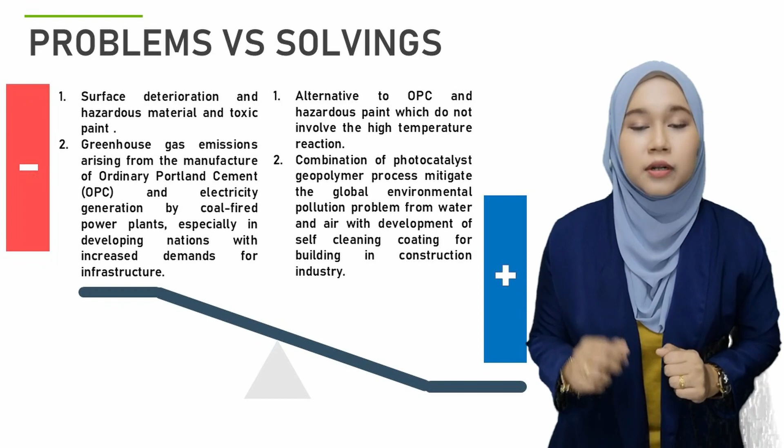What is geopolymer actually? To simplify the meaning and mechanism of geopolymer, it is an ecologically friendly inorganic material which can be produced at low temperature from industrial waste such as kaolin, fly ash, GGBS, or mining residue. That is the way we turn waste into something valuable.

Geopolymer incorporated with photoactive material such as zinc oxide and titanium dioxide, in the presence of UV and UV-visible radiation, can oxidize and decompose surface pollutants on a building or roadway, allowing the products to be subsequently easily removed later by rain, washing with water, because of the hydrophilic surface of the photocatalytic geopolymer with a low water contact angle, allowing it to slide off all the water and dirt properly.

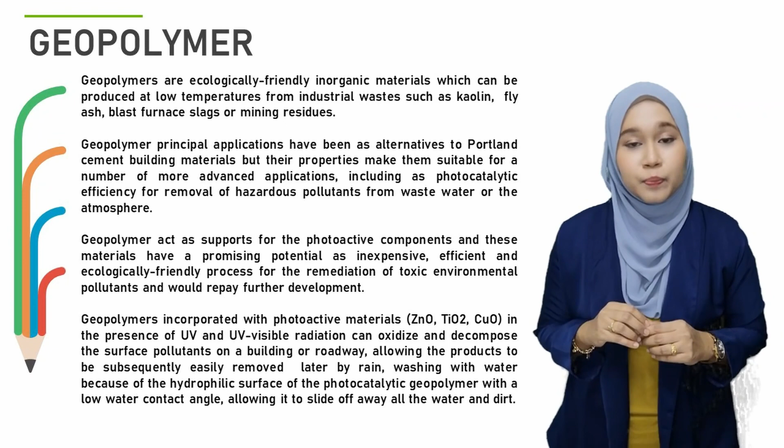A photocatalyst coating is energized by the presence of light. The excitation of the photocatalyst causes a number of reactions at the surface of the coating. This light stimulation of the photocatalyst transforms the coated surface, creating air purification and self-cleaning properties.

So this is how we produce the geophotopaint. First step, we are using metakaolin as inorganic material combined with alkali activator, which is sodium hydroxide and sodium silicate.

After that, zinc oxide as photocatalyst material was added into the geopolymer paste homogeneously. Next, the paste was cured for 24 hours at room temperature. So it's time to coat our geophotopaint on any substrate, including ceramic, concrete, and steel.

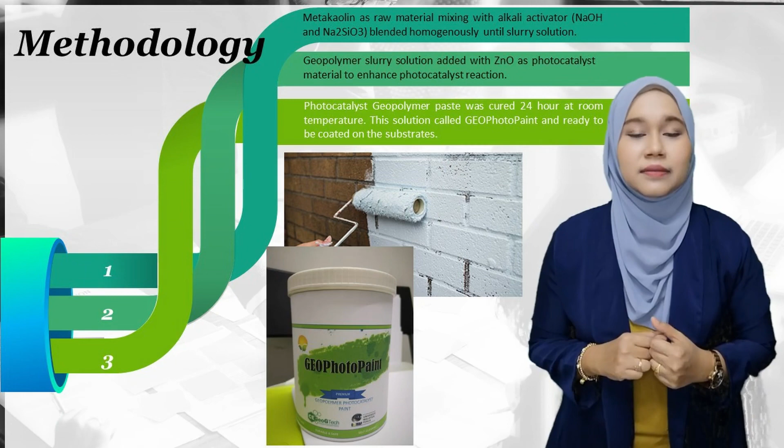Listed here are several geophotopaint performances. First, on the effect of photocatalyst by degradation of methylene blue, shows the color absorbed by UV light after 60 minute exposure. That is graded compared with other organic coatings which do not have the effect of photocatalyst.

Second, geophotopaint has high adhesion strength between coating and substrate, up to 5 megapascal. Another performance is rapid setting time, which is 60 minutes compared with OPC's 90 minutes, and other paints usually around 4 hours.

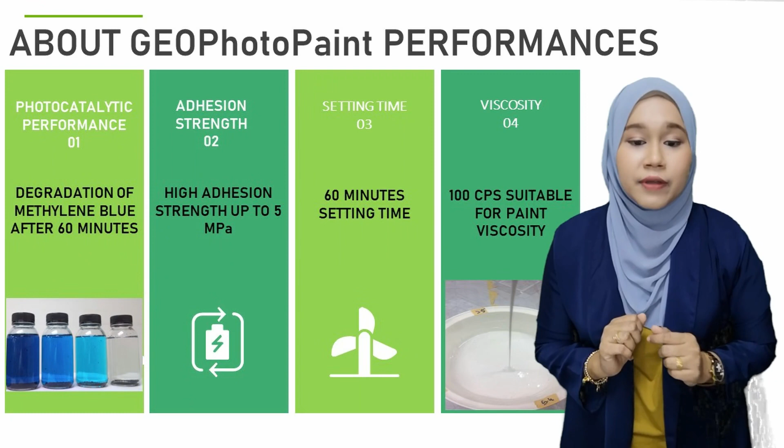I'm very happy to share the benefits of using geophotopaint. First, it is non-toxic and less hazardous. This is a very good benefit to human life and the environment.

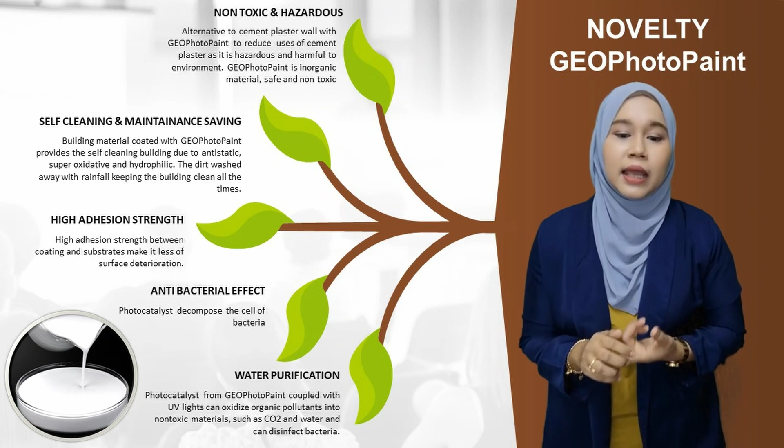Self-cleaning and maintenance saving: high adhesion strength between coating and substrate makes less surface deterioration and long-lasting coating. Antibacterial effect because it decomposes the cell of bacteria, and also water purification by decomposing dirt and pollutants that contact the surface. It can be used in a wide range of applications.

So these are all the suitable applications of geophotopaint, including brick, ceramic, tile, bridge, pavement, and many more.

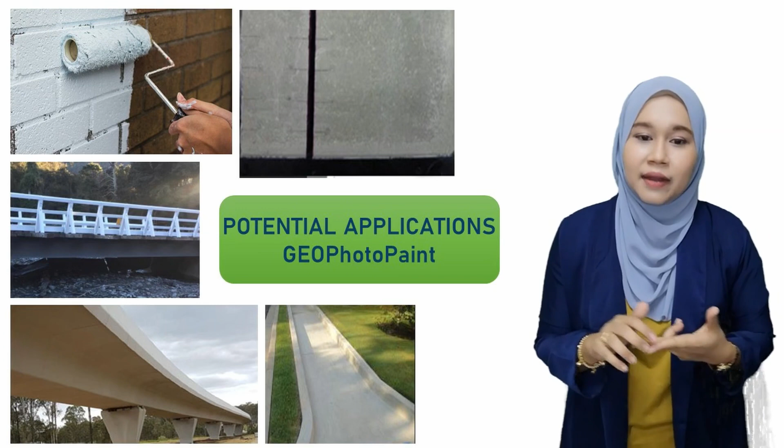What you get from this product is self-cleaning properties, which surely reduces maintenance cost, easy application, fast setting time, ability to reapply this coating, and good adhesion bonding between coating and substrate.

Our research has also been patented with a US patent, Malaysian patent filing, and also European patent filing. So thank you very much for listening, and I hope all of you get the benefit from this invention.

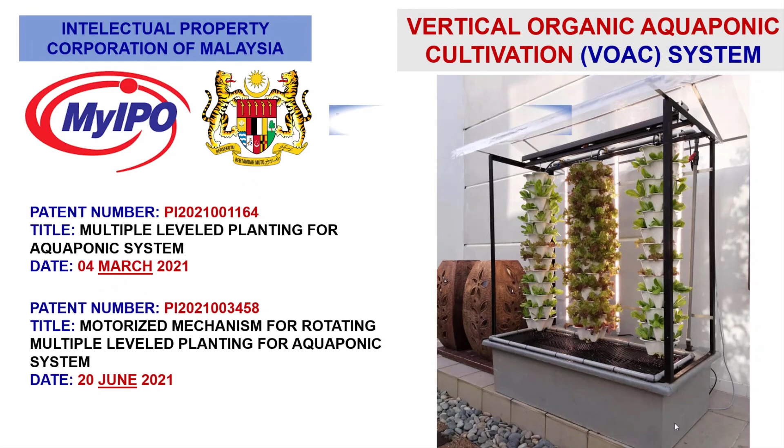Vertical Organic Aquaponic Cultivation (VOAC) System. This innovation has been patented at the Intellectual Property Corporation of Malaysia in June and March 2021.

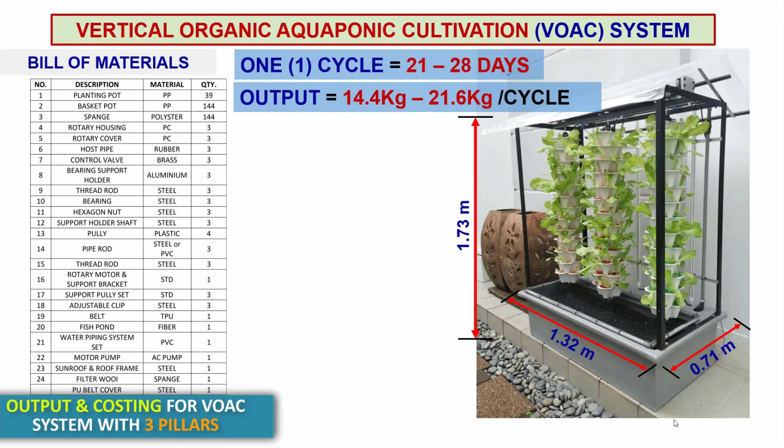One cycle of the VOAC system is between 21 to 28 days, and the output of vegetables per cycle is between 14.4 kg to 21.6 kg. These are the costs of the VOAC system.

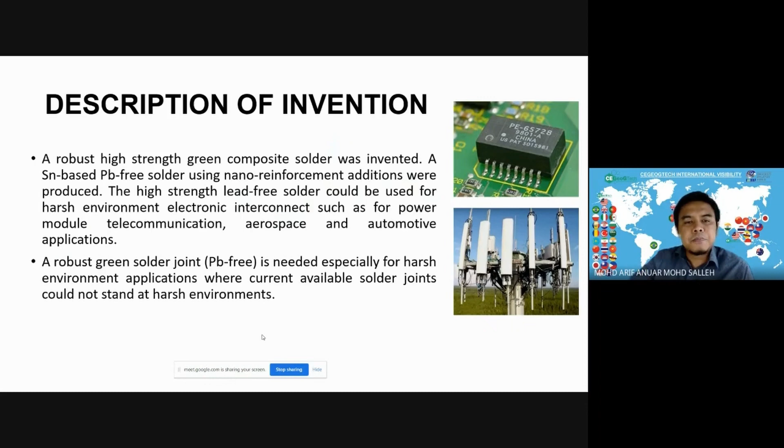This is an example of where the solder joints are inside an electronic or electrical device. This is an example of a motherboard of your iPhone. So this is where the lead-free solder joints are.

So the lead-free solder joints are made with three main objectives. First is for a conductive path. Secondly is for thermal conductivity, and thirdly is for mechanical support.

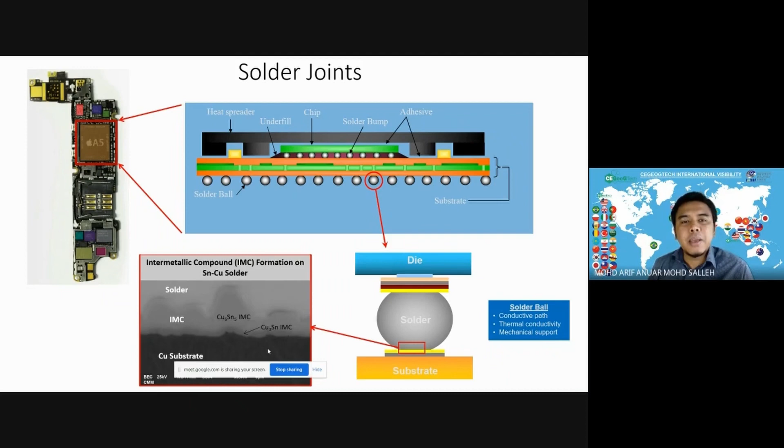For the problem statement: telecommunication networks, aerospace, and automotive components comprise digital electronics. Like any other computer or sensitive electronic components or equipment, these electronic components are susceptible to damage from mechanical loadings, temperature, and also electrical disturbance.

On the other hand, due to rapid technology advancement, old electronic components normally end up in landfill. Thus, an environmentally friendly electronic component following the RoHS legislation, the Restriction of Hazardous Substances legislation, is needed.

Besides that, we also need to have robust solder joints in order to eliminate catastrophic failures, especially in aerospace applications. For example, the air crash investigation for the Airbus A320 from Surabaya to Singapore in December 2014 found that the failure was due to cracked solder joints.

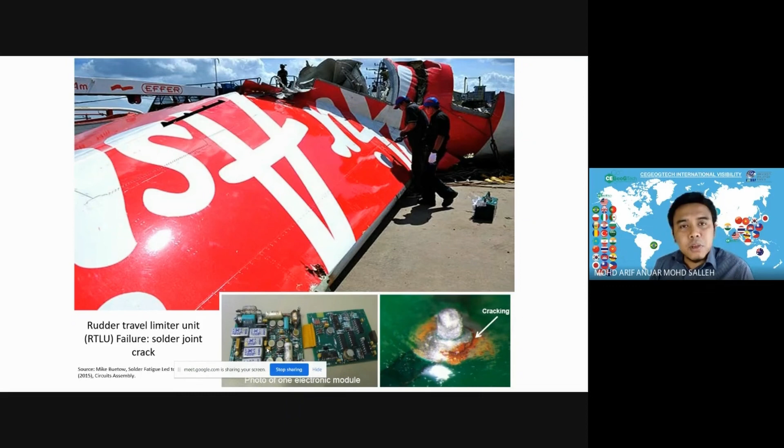From detailed investigation, it was identified that the rudder travel limiter unit (RTLU) failure was due to solder joint crack. This shows why we really need a strong, robust lead-free solder joint, especially for harsh environments such as aerospace application,

automotive application, and also telecommunication applications. Following the Sustainable Development Goals, our invention follows SDG number 9, Industry, Innovation and Infrastructure, and also SDG number 11, Sustainable Cities and Communities. The reason for number 9 is since we are producing robust lead-free solder joints, it is for the electrical interconnects for various applications. On the other hand, SDG number 11 is due to the lead-free solder joints that we are producing.

So we know that due to rapid technology, electronic components normally end up in landfill. Since we are producing these lead-free solder joints, we are able to make sure that we have a sustainable city and also community.

The novelties of our invention are, firstly, its excellent thermal resistance for high power module applications, whereby our solder material can stand up to high temperature. Besides that, the outstanding solderability and mechanical properties of our solder joints.

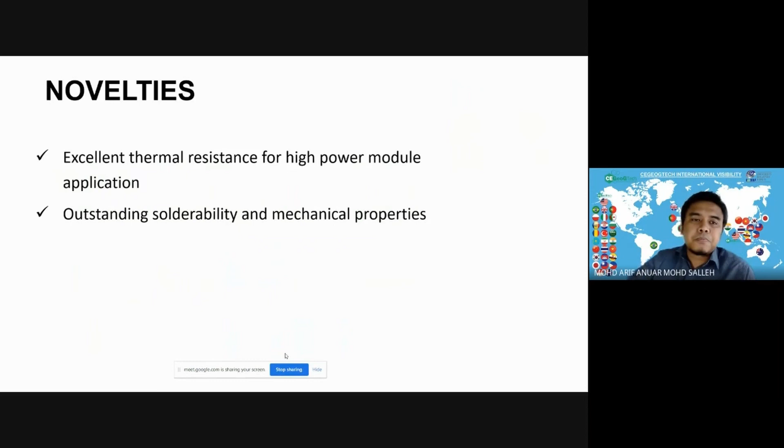The invention advantages of our solder material are: first, excellent solder with good wettability. Second is excellent thermal stability. Thirdly is low production costs. Fourthly is oxidation resistance. And finally, environmentally friendly, since we are producing a lead-free solder material.

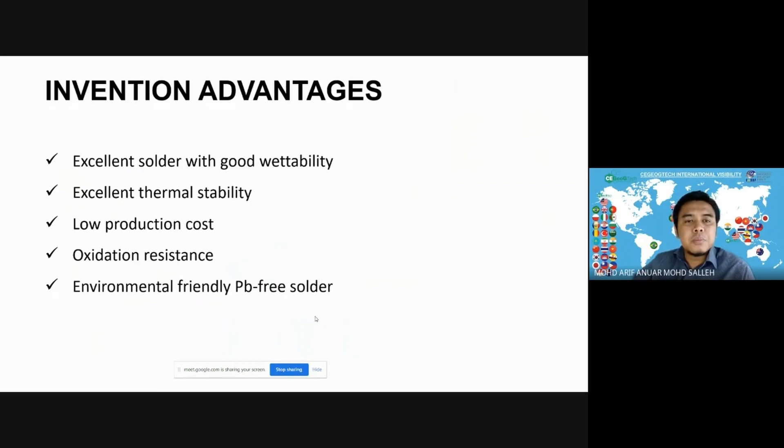For the commercial potential, it is a non-hazardous solder material. It is recommended to replace the existing tin-silver-copper, normally known as SAC, and also tin 0.7 copper solder for different solder applications. It could also be used for a wide range of harsh environmental applications, such as telecommunication, aerospace, and automotive applications.

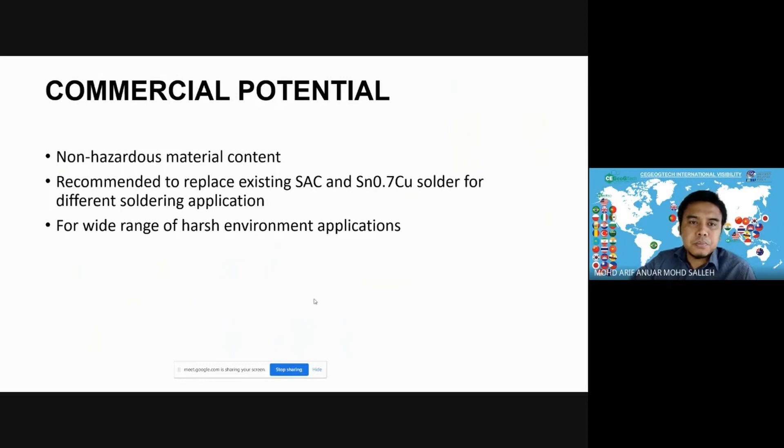This invention is in collaboration with Nihon Superior, based in Osaka, Japan. This research project was conducted since 2012.

For the patent of our invention, we have patented our invention, which is patent granted. First is the solder composition and method of production thereof. And also recently we have filed a patent for a system and method of producing granulated solders.

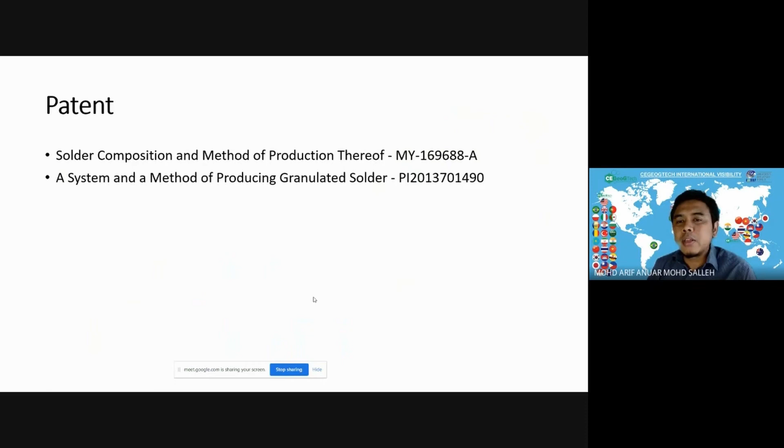Besides that, in research development, we have also published several leading impact publications. For example, in 2017, we published in Scientific Reports. In 2016, we published in Journal of Electronic Materials. In 2018, we published in Solid State Phenomena.

We have also published or presented this invention in several leading conferences, such as the International Conference of Functional Materials and Metallurgy in 2016, and also a conference which led to the publication in Materials Science Forum in 2016.

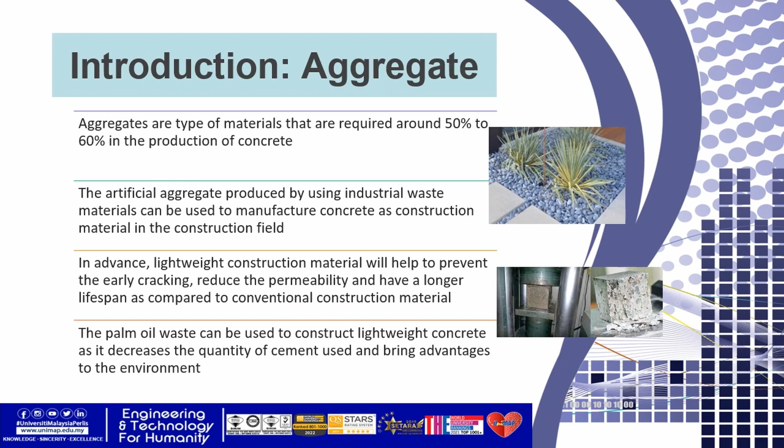What is geopolymer? Geopolymer has been viewed as a potential, ideal, and green material to replace cement. The recycling of Portland cement-based concrete as recycled aggregate was investigated diffusely, while the reuse of geopolymer was paid little attention. In comparison to OPC concrete, geopolymer is characterized by a low carbon footprint with high chemical resistance,

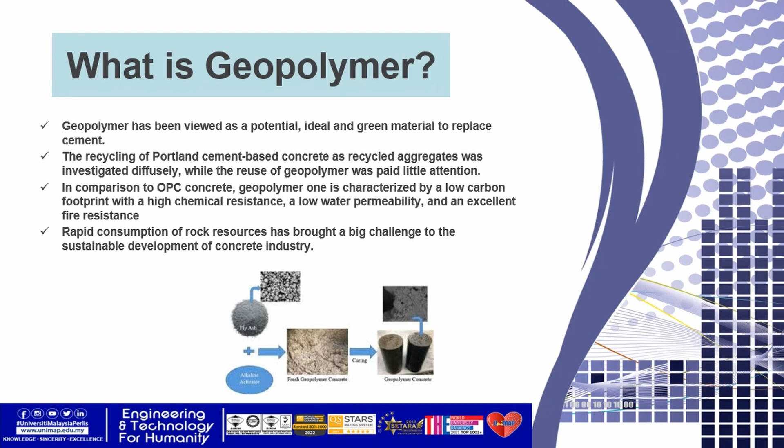low water permeability, and excellent fire resistance. Rapid consumption of rock resources has brought a big challenge to the sustainable development of the concrete industry. The main problem statement is related to the high abundance of palm oil waste in Malaysia.

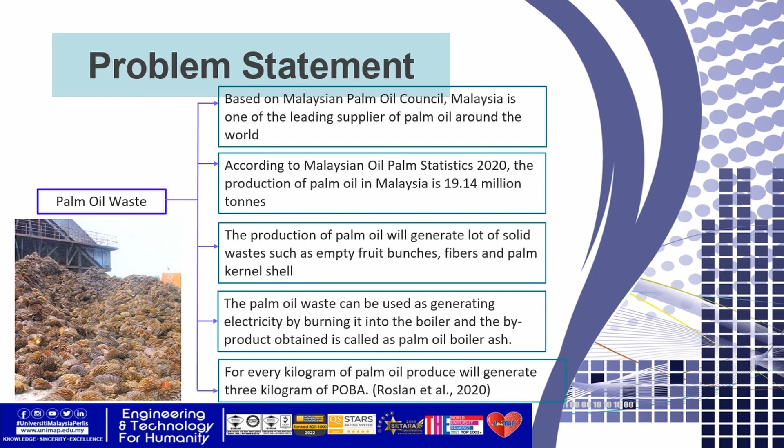Based on the Malaysian Palm Oil Council, Malaysia is one of the leading suppliers of palm oil around the world. According to Malaysian Oil Palm Statistics 2020, the production of palm oil in Malaysia is 19.14 million tons, and the production of palm oil will generate a lot of solid waste such as empty fruit bunches, fibers, and palm kernel shell. The palm oil waste can be used for generating electricity by burning it in the boiler, and the byproduct obtained is called palm oil boiler ash.

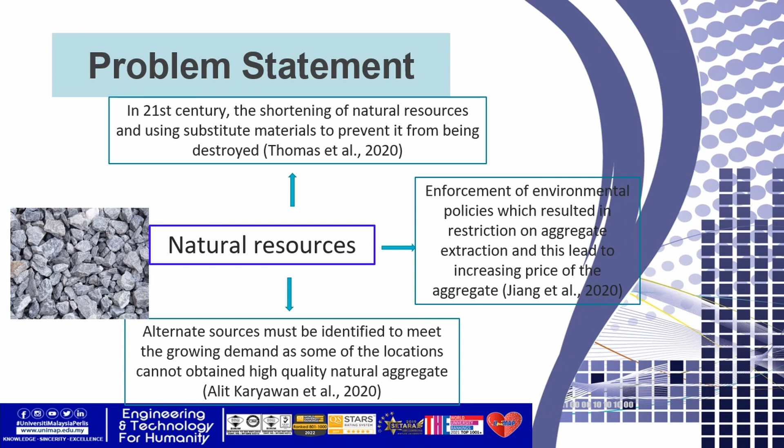The other problem statement is related to the depletion of natural resources of aggregate. New alternative production of aggregate should be investigated to meet the growing demand of aggregate. The method of synthesis of aggregate, especially for lightweight aggregate, consumes high energy due to the high sintering temperature used to achieve the lightweight properties.

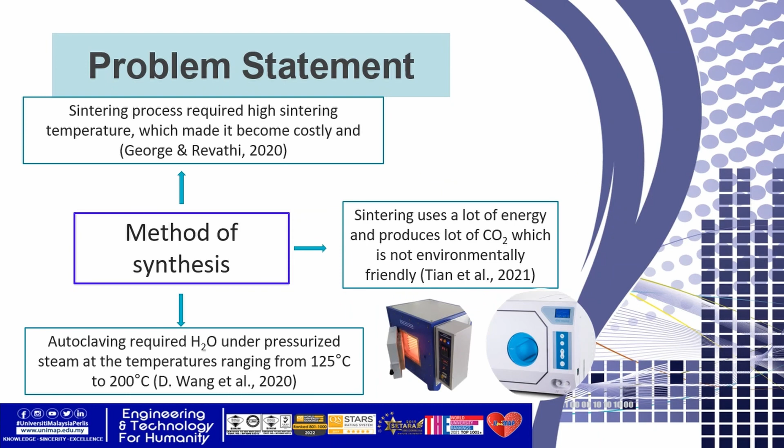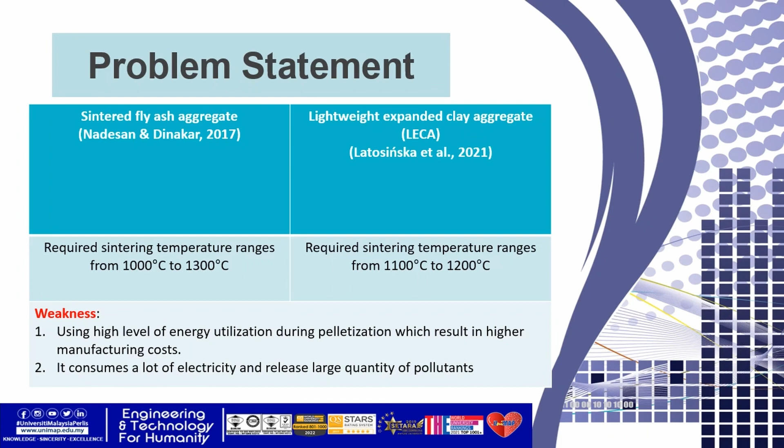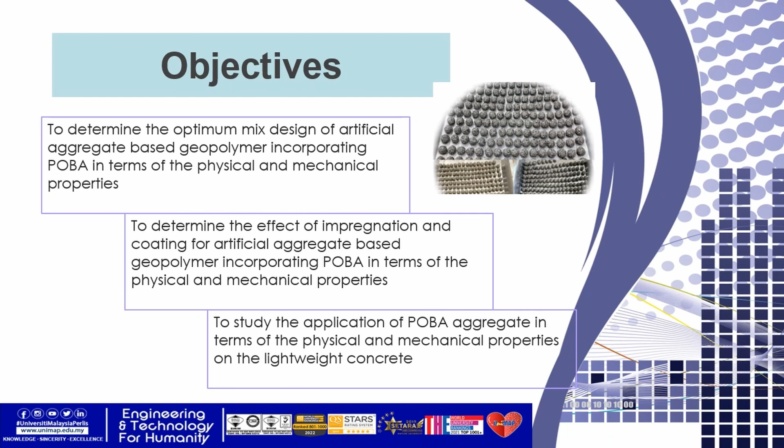This led to high energy used during the pelletization process that results in higher manufacturing costs. Thus, artificial aggregate-based geopolymer incorporating palm oil boiler ash is introduced in this research.

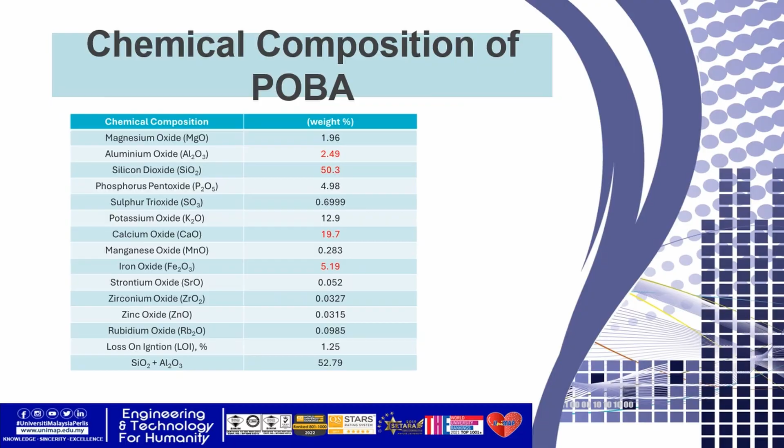This is the chemical composition of palm oil boiler ash. It shows that POBA consists of a high composition of silicon dioxide, aluminum oxides, and calcium oxides, which makes it suitable to be used as raw material for geopolymer, and more environmentally friendly since it does not use high sintering temperature.

The palm oil boiler ash that has been collected will be ground and sieved into powder form. The palm oil boiler ash will be mixed with an alkali activator consisting of sodium hydroxide and sodium silicate to form the POBA geopolymer paste. Then the POBA geopolymer paste will be pelletized into the required shape and size to produce POBA geopolymer aggregates, which will be hardened in the oven at 80 degrees Celsius for 24 hours. The ready samples will then be tested for specific gravity, water absorption, aggregate impact value, and aggregate crushing value.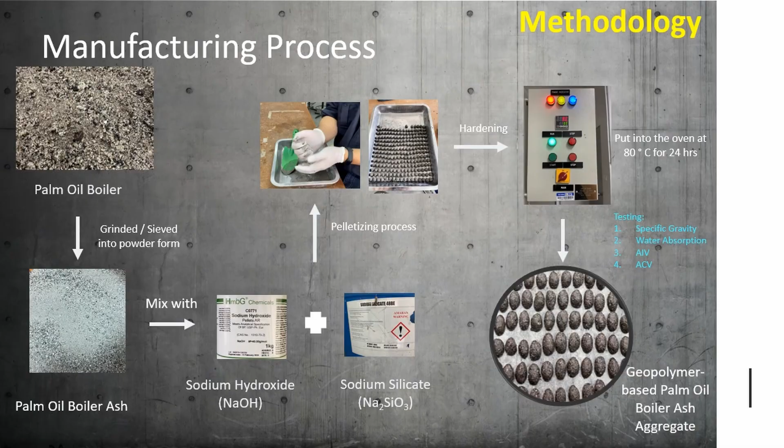Here is the video showing the process of producing POBA geopolymer aggregates. First, palm oil boiler ash is grinded into fine powder form by using a mortar and pestle.

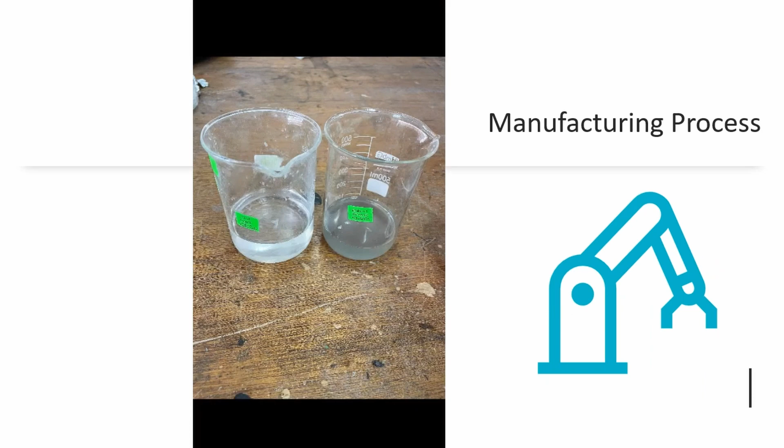Then, palm oil boiler ash is mixed with sodium hydroxide solution and sodium silicate solution until it is mixed well.

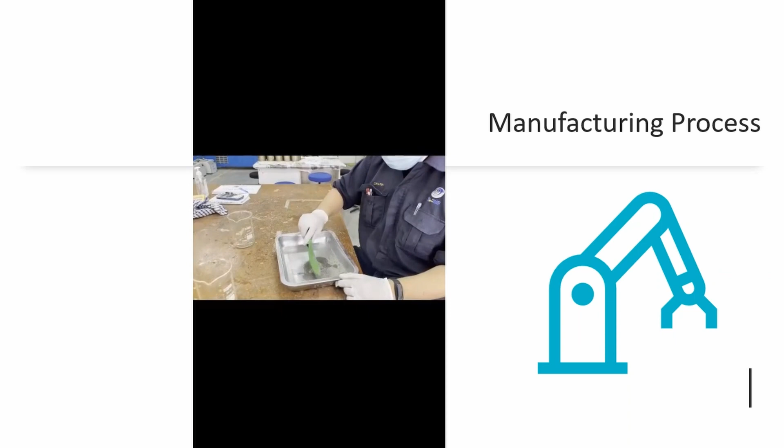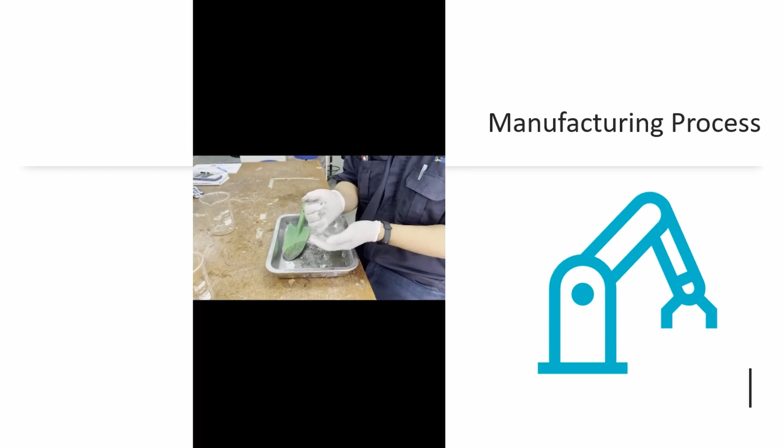The geopolymer-based palm oil boiler ash sample is manually made into aggregate size by hand. After the aggregate is made, the artificial aggregate is poured onto the tray and the step is repeated.

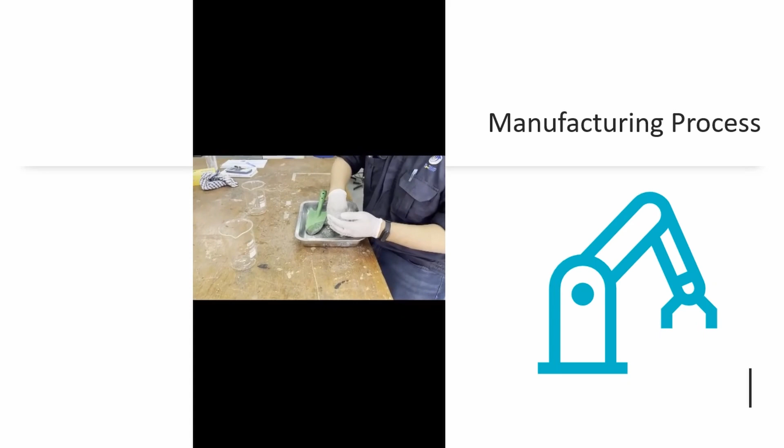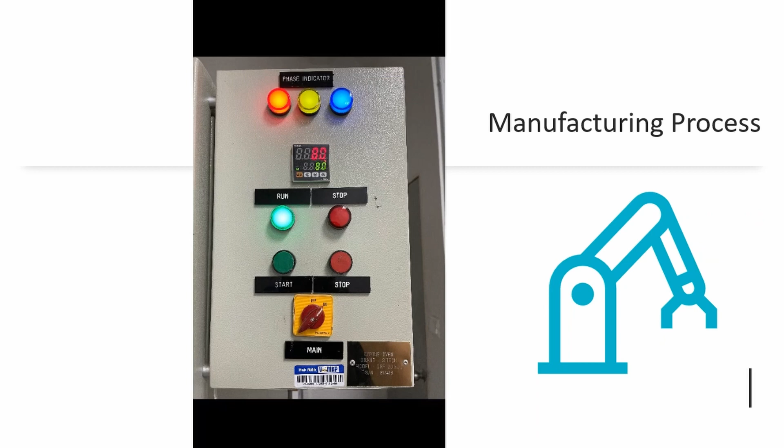When the artificial aggregate is made, the geopolymer-based artificial aggregate will be put into the oven at 80 degrees Celsius for 24 hours. For the findings of this study, as we can see in Table 1, it shows the properties of POBA geopolymer aggregates.

For the specific gravity, it has been obtained in the range of 1.3 to 1.6. The aggregate impact value is in the range of 24 to 29%. The aggregate crushing value is in the range of 25 to 29%. And water absorption is in the range of 20 to 26%.

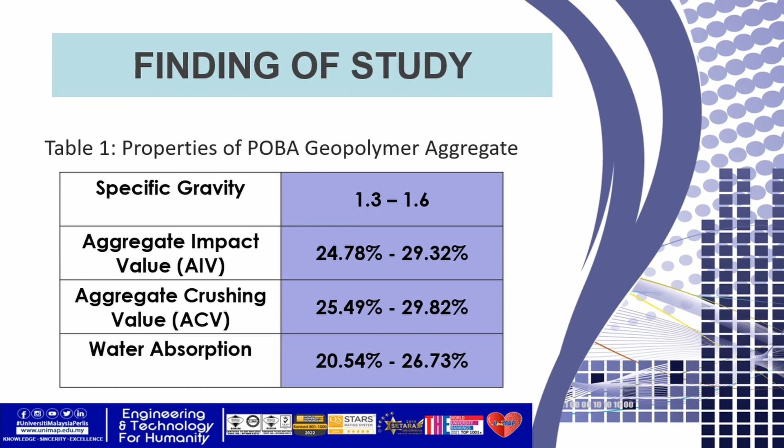For the specific gravity, as you can see here, all samples show specific gravity less than 2.0, which can be considered as lightweight aggregate.

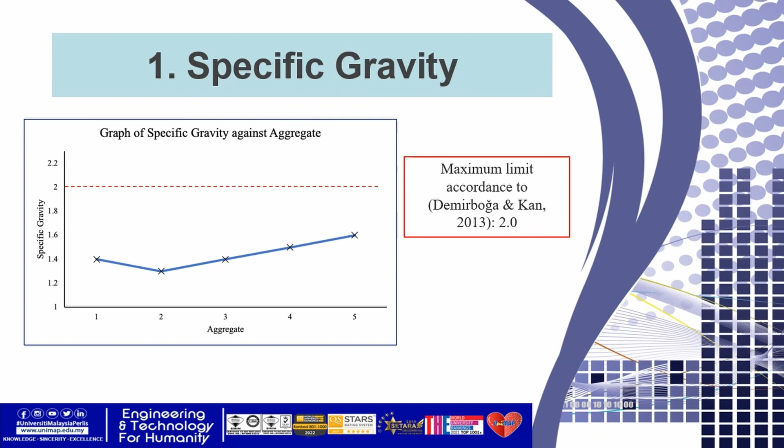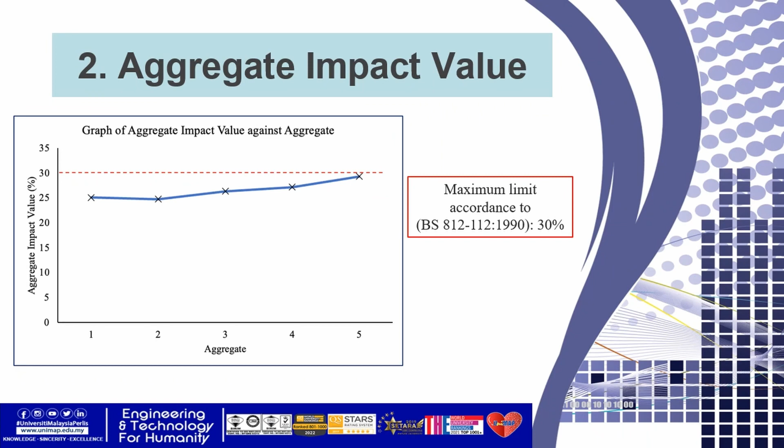And the aggregate impact value for all samples shows a value of AIV less than 30%, which shows that the aggregate produced is a strong aggregate.

The same pattern also shows for aggregate crushing value. The aggregate crushing value results are below 30%, which can be considered a strong aggregate.

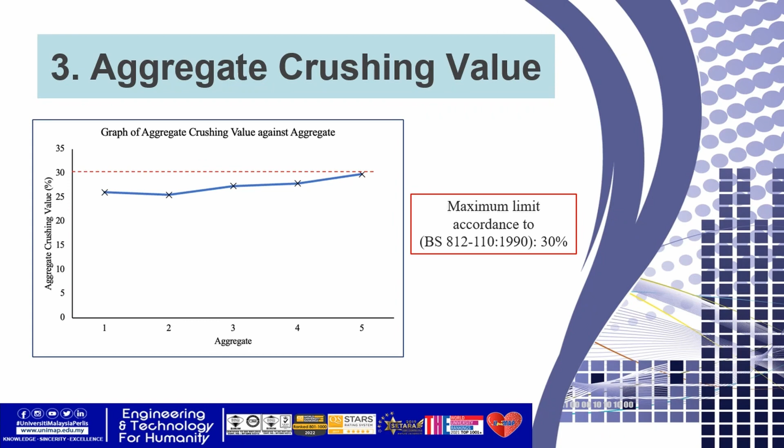For water absorption, all samples show water absorption obtained in the range of 25%, which is still under the limitation.

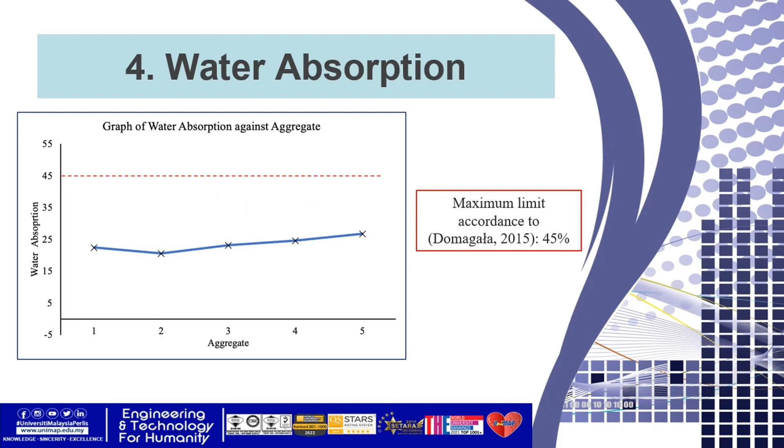Here is the graph of aggregate impact value versus water absorption, and the graph of aggregate crushing value against water absorption. As you can see here, both graphs show a strong correlation between aggregate impact value or aggregate crushing value against water absorption.

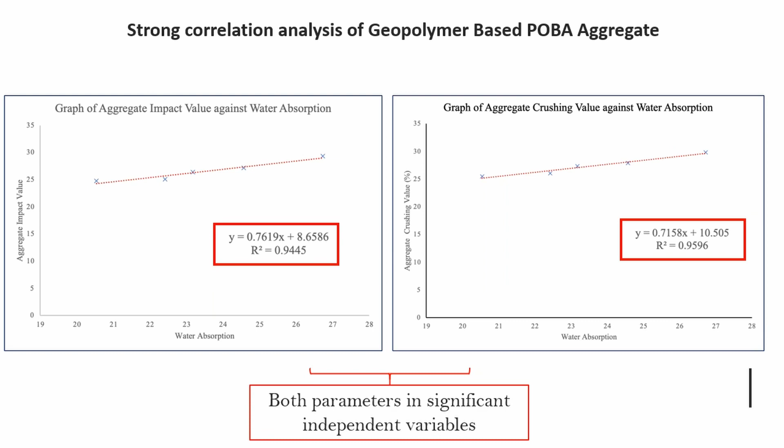For the performance of POBA geopolymer aggregates in lightweight concrete, the density of the lightweight concrete will be in the range of 1,810 kg per meter cube to 1,850 kg per meter cube, and the compressive strength achieved is up to 22.5 megapascals for 28 days.

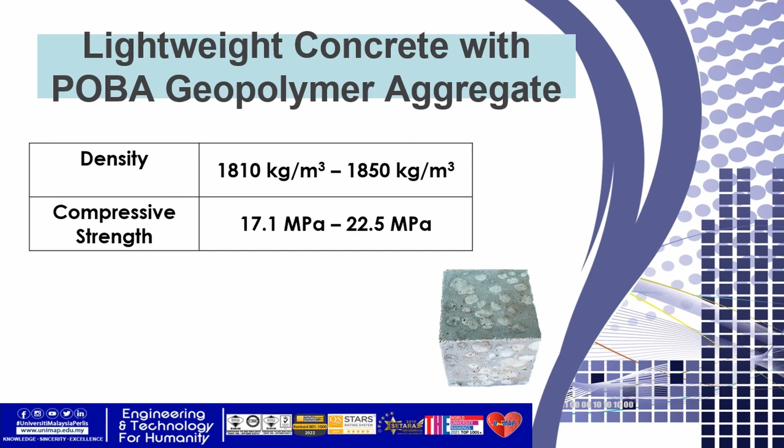Here is a comparison of the lightweight concrete with POBA geopolymer aggregates compared with the American Concrete Institute, which is the guide for structural lightweight aggregate concrete. As we can see here, the density is almost similar, and the compressive strength for the lightweight concrete with POBA geopolymer aggregate is higher than the ACI provided.

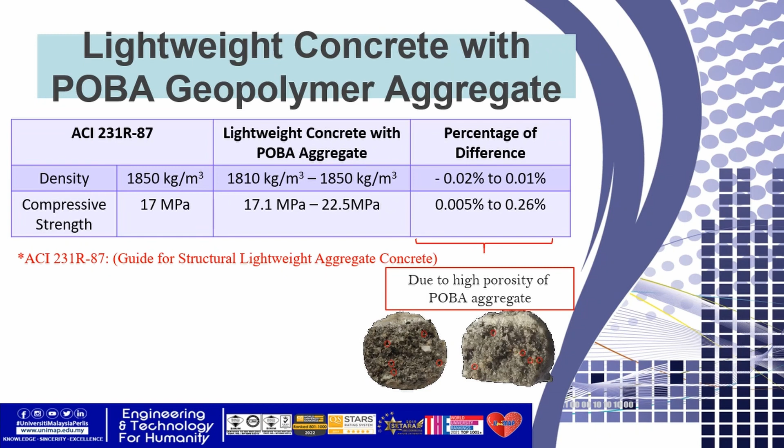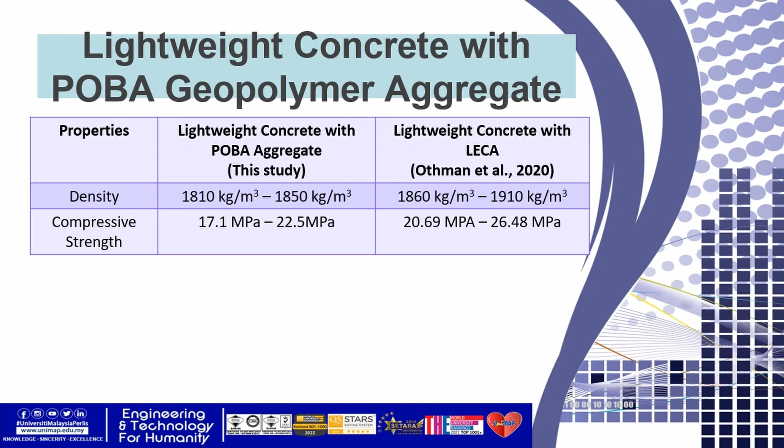As a conclusion, specific gravity and water absorption tests for the POBA geopolymer aggregate are in a certain range to be used as lightweight aggregate. Aggregate impact value and aggregate crushing value for POBA geopolymer aggregate are less than 30%, considered a strong aggregate. Geopolymer-based palm oil boiler ash aggregate has the potential to be used as lightweight aggregate for lightweight concrete and also for hydroculture for plants.